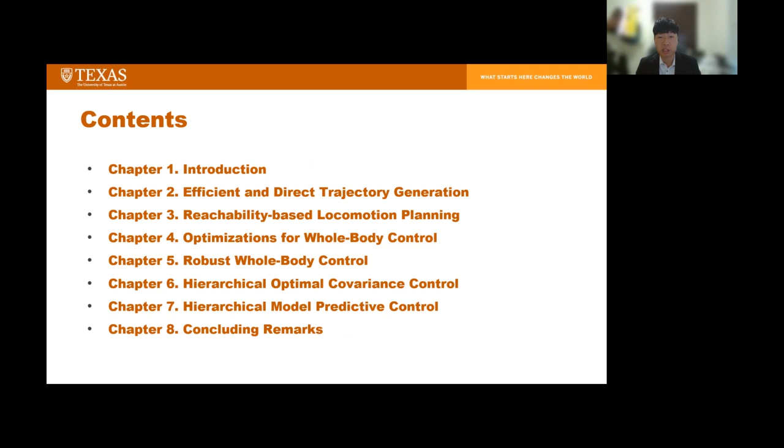The title is Whole Body Trajectory Generation and Control Strategy for Multi-Contact Robots. This presentation will cover these chapters in my thesis, but I will briefly introduce some parts due to time limitation. To begin, I'll share some background and motivation of my studies.

First, I'd like to introduce many robots I have experienced. In our lab, many robots have been developed and used, for example Mercury, Draco 2, Scorpio, Dreamer, and Valkyrie. I believe these robots have distinguishable features.

First, they generate human-like motion, such as dynamic locomotion and dexterous manipulation. Sometimes the robot produces legged manipulation like a human with multi-contact. Secondly, we aim to put these robots in unstructured environments, such as real human life, because these robots give us really good productivity while doing assigned missions in that environment.

Of course, the behavior should be optimal, in my opinion. Third, we should consider physical interaction, such as ground reaction force or unknown disturbances. Lastly, human-centered robots are usually operated with human-robot teaming, so they require safety-warranted behavior.

Oops. Oh, sorry, something wrong here.

Trajectory generation and path planning have been broadly investigated in the robotics community. To make continuous and smooth trajectories, we use many interpolation methods such as cubic spline and B-spline. Also, we've used RRT and PRM techniques, which are basically sampling-based techniques.

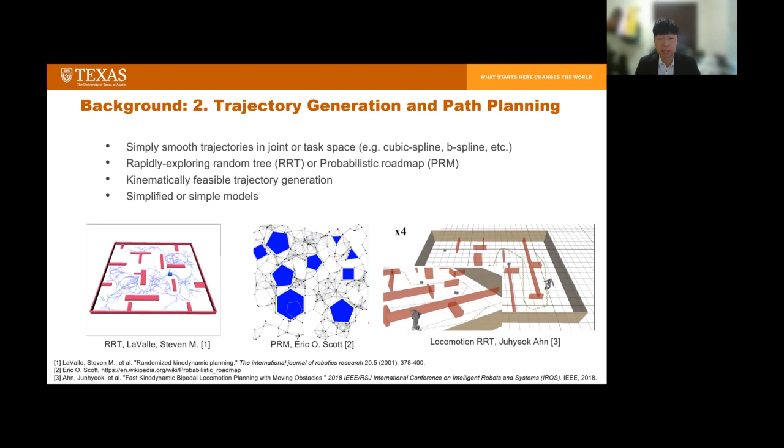In fact, contact is the main reason trajectory generation problems become more difficult. Many complex robots like legged robots, manipulators, and humanoid robots involve multiple contacts and frequently change the contact sequence. Also, the contact-related constraints are typically mixed state-input nonlinear constraints.

So we solve large-scale nonlinear optimal control problems to generate trajectories using optimal control techniques. According to recent publications, many research groups are utilizing nonlinear programming, mixed integer programming, and differential dynamic programming. As you know, it takes a tremendous amount of time to solve large-scale nonlinear optimal control problems, especially for a humanoid robot.

To speed up computation time, we use many approximations and simplification methods. Also, we can use simplified models such as centroidal dynamics or linear inverted pendulum model to reduce the dimension of our system. However, the solution to this problem may not fulfill the full body constraints, such as joint position, velocity, and torque constraints. Therefore, it is really important to solve the original nonlinear optimal control problem in a computationally efficient way.

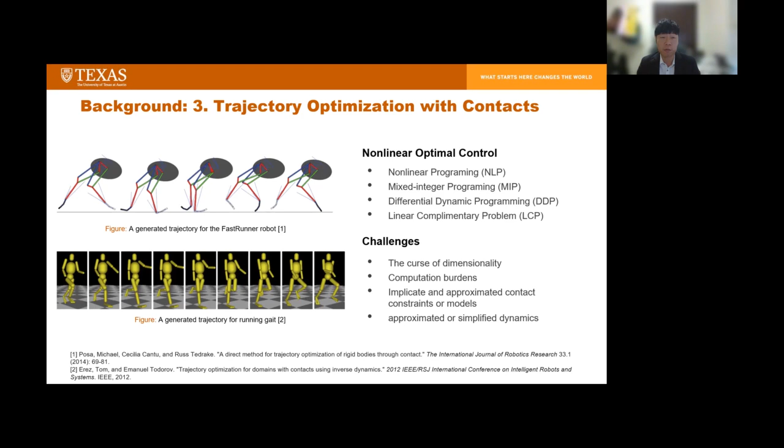Let's move to whole body control. Whole body control aims to define a small set of low-dimensional and straightforward rules, such as equilibrium and self-collision avoidance. Whole body control methods warrant the exact execution of one or multiple tasks. In most cases, the multiple tasks have a hierarchy in terms of their importance. Also, whole body control will exploit the full capacity of the entire body in compliant multi-contact interaction with the environment.

You can see many full body humanoid robots in the world. Whole body control will cover a lot of topics to control these robots: whole body position force control, model-based dynamics control, centroidal momentum control, multi-contact force distribution, agile locomotion, and dexterous manipulation.

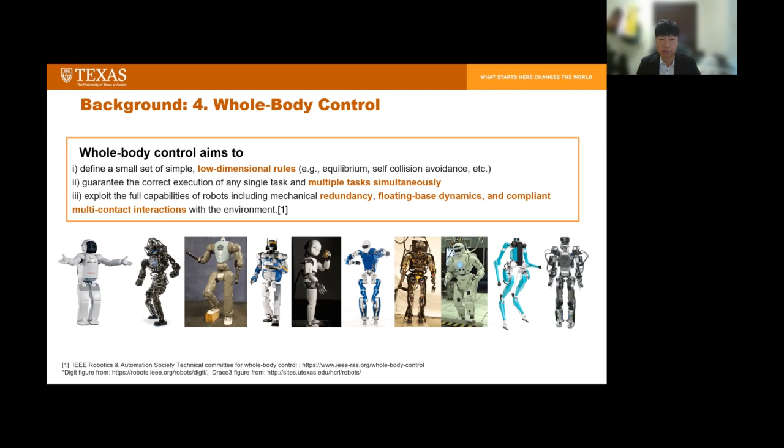Here is the motivation of my research. I'd like to introduce three main challenges for humanoid robot studies: trajectory generation, optimization, and tracking. My study aims to overcome these challenges to bring the humanoid robot into a human environment. We can think about what makes the problem more difficult: complex and nonlinear robotic systems, interaction with the environment or other agents, and multi-layered architecture.

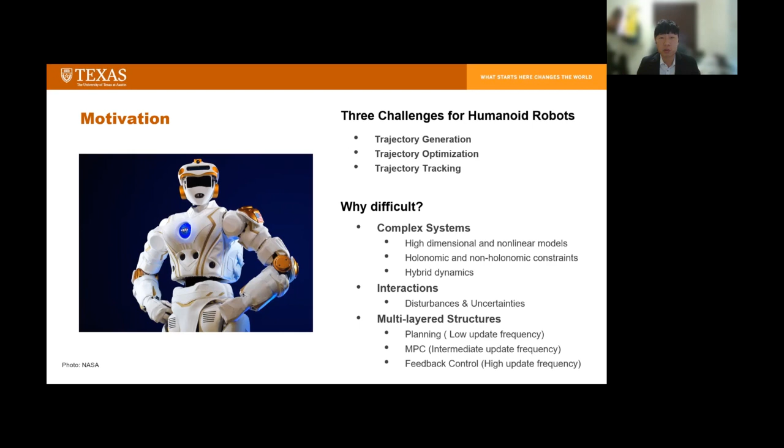Since both robot models and constraints are usually nonlinear, we have many difficulties generating trajectories with a reasonable time specification. Also, the computation time affects the multi-layered structure's stability. For this reason, I improved the performance of planning and control algorithms with reduced computation time. Robustness of the algorithm is also very critical for operating the robot while interacting with the environment, so we propose more robust whole body control approaches in terms of unknown perturbations and uncertainties.

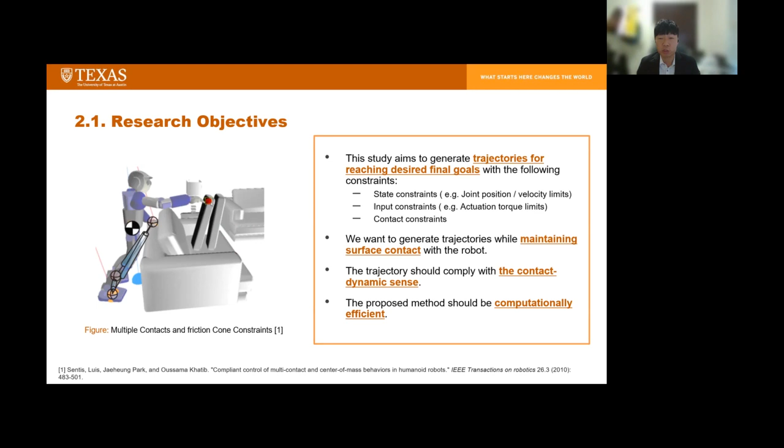I'm going to start by sharing my first study for efficient and direct trajectory generation of humanoid robots. This study aims to generate a trajectory to reach a final goal considering full body dynamics and complicated constraints. We consider state, input, and contact constraints, and joint position, velocity, torque constraints, which are very practical in real experiments. Also, we propose a very computationally efficient method without any simplification or reduced order model, like a linear inverted pendulum model.

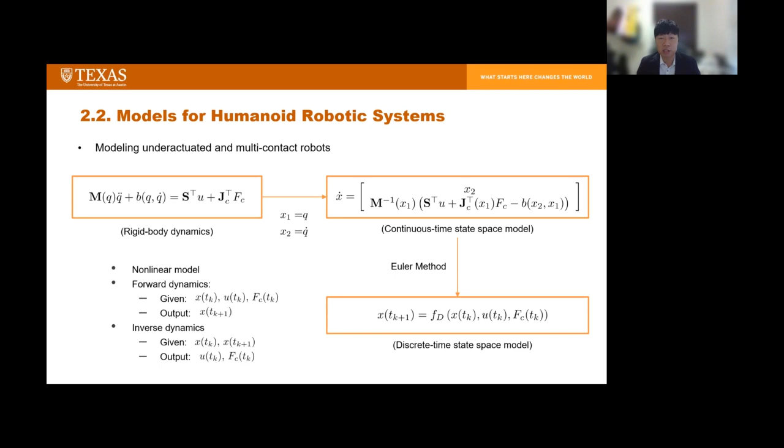Here I will briefly introduce the robot's full body dynamics and the state space model we used in this study. The rigid body dynamics of the underactuated robot is the first box of the equation. Floating-base robots, such as legged robots or humanoid robots, follow this underactuated robot dynamics. We can express the rigid body dynamic equation as a continuous time state space model, shown on the right side of the box. In turn, we can discretize the state space model as shown in the last equation. Unfortunately, the final model is still a nonlinear model.

As you know, joint position, velocity, and torque constraints are linear. The contact geometry and kinematic constraints are nonlinear state equality constraints. More specifically, the contact position should be constant, and both contact velocity and acceleration must be zero. We consider contact wrench constraints to prevent any slip and flipping motion of the contact body. This constraint is a mixed state-input constraint and even nonlinear, because matrix W is a function of Q configuration. As you can see, we need to consider very complicated constraints to warranty the feasible behavior of the humanoid robot.

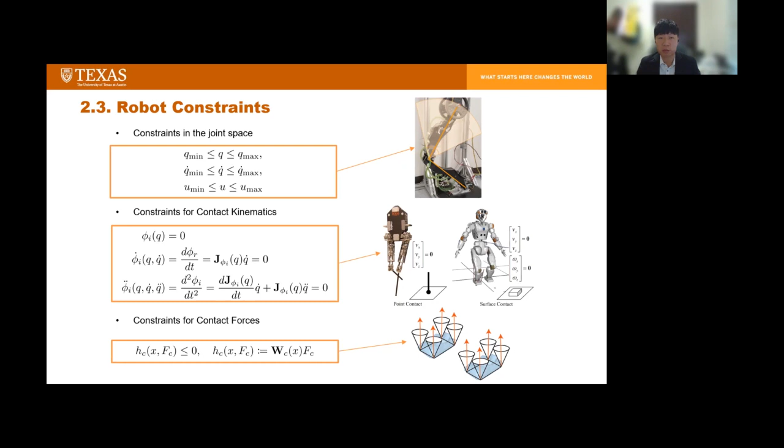Now we formulate an end-to-end trajectory generation problem for the humanoid robot. More specifically, the problem is to find a feasible state and input trajectory to reach a final goal when only the initial state and desired goal output are given. Of course, complex constraints should be satisfied while generating the motions. This is really a large-scale nonlinear optimal control problem, and it is very challenging to solve for a robot with multiple contacts. So we propose a novel method to solve this end-to-end trajectory generation problem very efficiently.

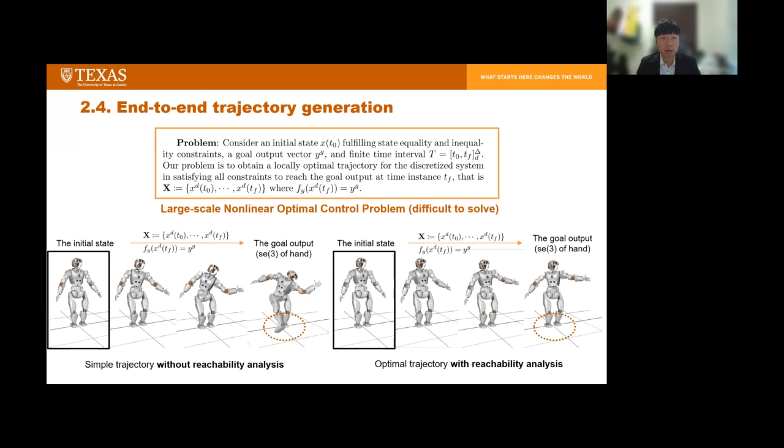First, we obtain the sample-wise state reachable set using a sampling-based technique. Then we formulate a POMDP problem to obtain an optimal sequence of output sub-regions. We check whether it is possible to move from the current output sub-region to the next one using our reachability tool. After confirming it is reachable, we sequentially solve the standard optimal control problems to reach the final goal. Let's move on to the details.

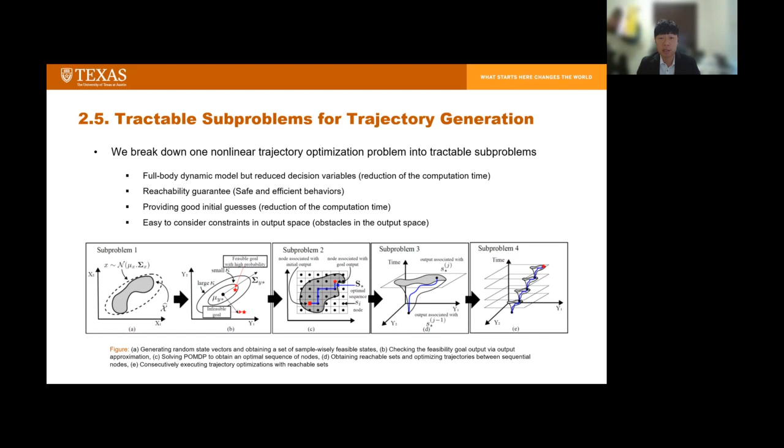First, we define the state sample-wise reachable set as a collection of states satisfying all constraints we have. This set is utilized to formulate the next POMDP problem.

I briefly explain how to obtain the set. We draw a random state sample from a Gaussian distribution and update it to satisfy the state constraint using the gradient descent method and QP.

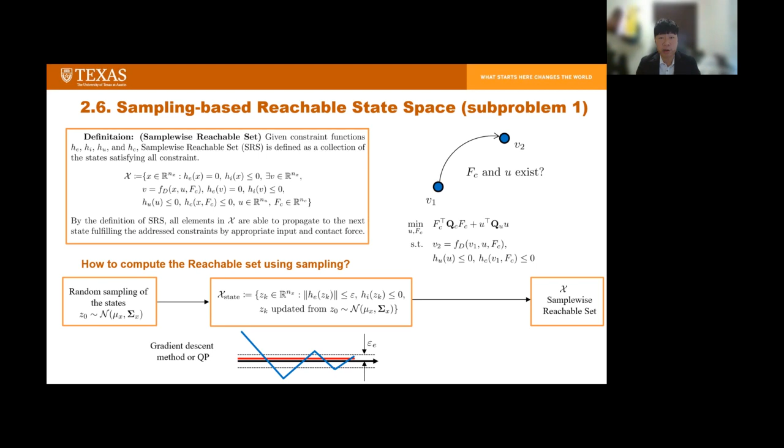In turn, we formulate the optimization to check there is at least one pair of control input and contact force satisfying our dynamics, input, and contact wrench cone constraint. If there exists at least one pair, we can collect the sample in our reachable set.

Based on the reachable set, we formulate a POMDP problem here. The main objective of this POMDP problem is to obtain a sequence of output sub-regions to maximize the reachable samples with conditional probability.

Secondly, we formulate a belief MDP problem using the previously obtained output samples and conditional probability. The reward function is formulated using the ratio of the cardinality of each subset. The key is how to formulate the belief transition function here.

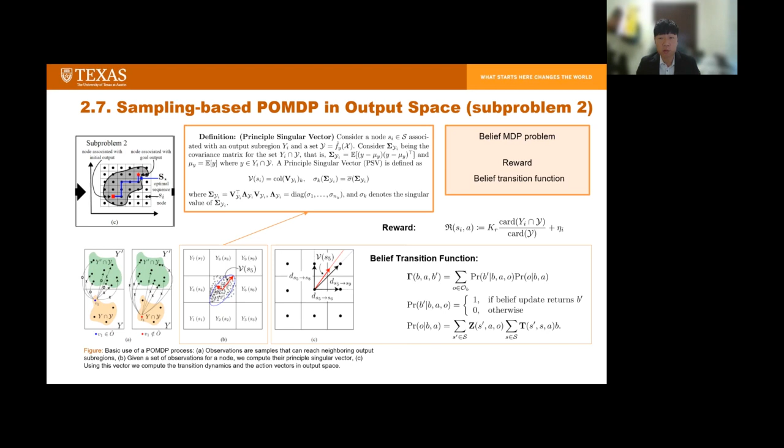The belief transition function can be formulated using the transition function and conditional probability Z. By solving this belief MDP problem, we can get the optimal sequence of output subregions toward the final goal.

To check whether the transition between the output subregions is feasible or not, we propagate our state using the formulated QP. There exist two propagation methods here: full state propagation and boundary state propagation methods.

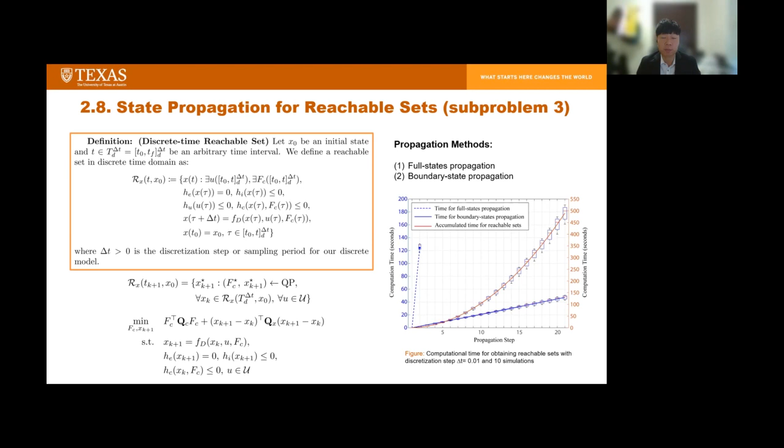After that, we sequentially solve the optimal control problems. We formulate the standard optimal control problem to obtain feasible state input trajectories here.

We define the performance index using output error and state error and some contact force term. We minimize this performance index subject to discrete time state space model, state inequality equality constraint, input constraint, and contact wrench cone constraint. The desired output will be the final goal if the next subregion is the last one.

Also, if the current subregion is the first one, then we use the given initial configuration as the initial state of this optimal control problem.

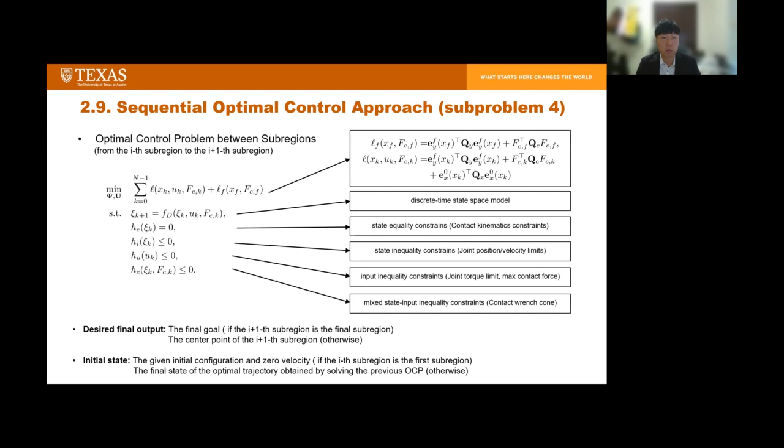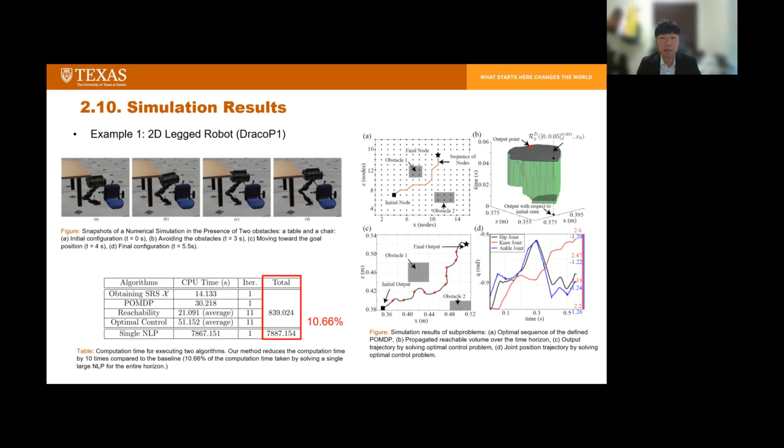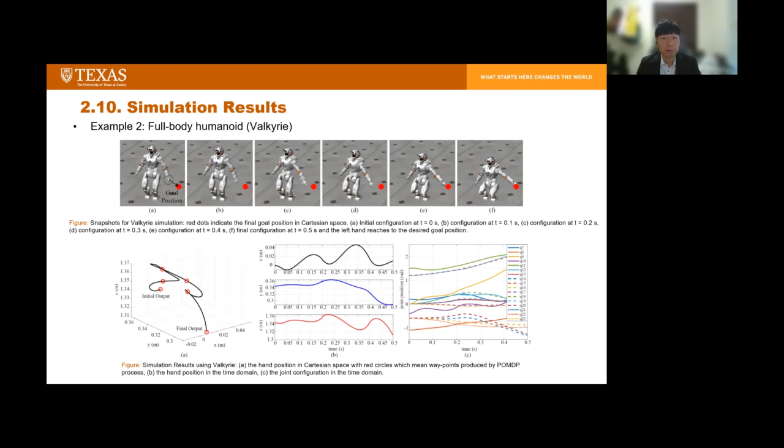So far, I presented the first part of my studies, and the second study is reachability-based locomotion planning.

We frequently use different models in the layered structure of whole-body control. For example, we employed a reduced order model at the planning level, but the feedback controller is based on full body dynamics. We are interested in the discrepancy between planning and control models.

In this study, we used the time to velocity reversal planner in the planning step. However, our whole body controller is a full state feedback controller. This means we don't know if the planned result can be reproduced by a full body robot. Sometimes the planned position cannot be reached due to the full body constraint.

We propose a method to check if the planned location is reachable, and in turn, optimize the trajectory for the next whole body controllers.

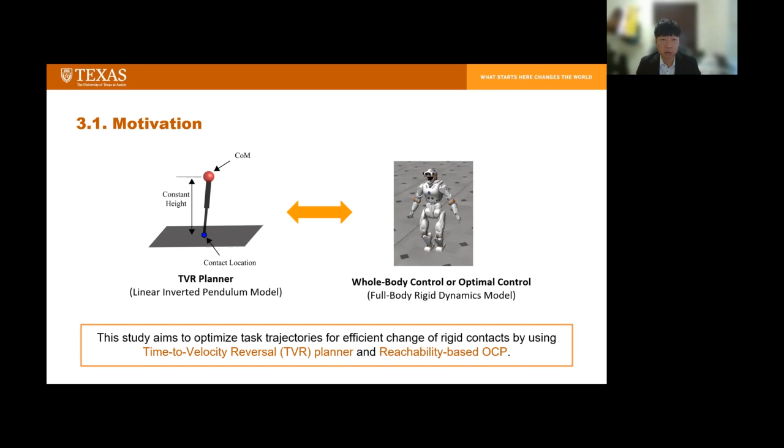However, we propose an additional part of kinematic feasibility test, reachability analysis, and optimal control for better locomotion. By using the proposed trajectory generation process, we want to make sure of safe and stable locomotion.

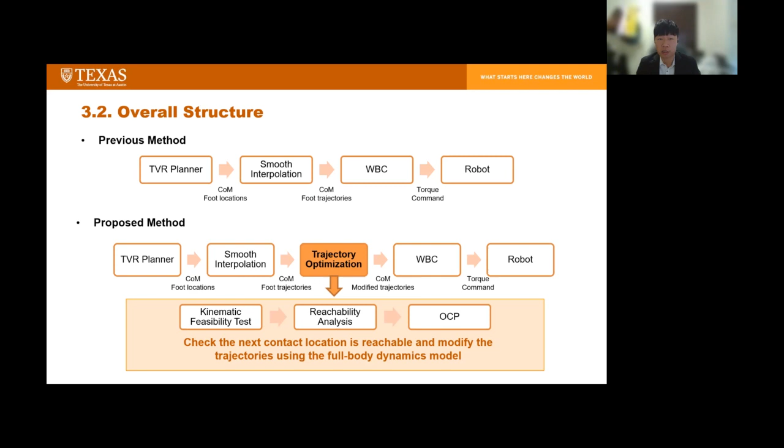Our TVR planner attempts to stabilize the robot by making its center of mass reverse direction every step. In its simplified model, the feet instantaneously change between swing and support mode, and the center of mass reverses its velocity at time t prime after the previous contact switch. The planner finds and returns the footstep location that causes the center of mass velocity to reach 0 at t prime time after the foot switches.

This planning method is very intuitive and easy to implement, also very fast and reactive, but full body constraints are ignored at the planning level.

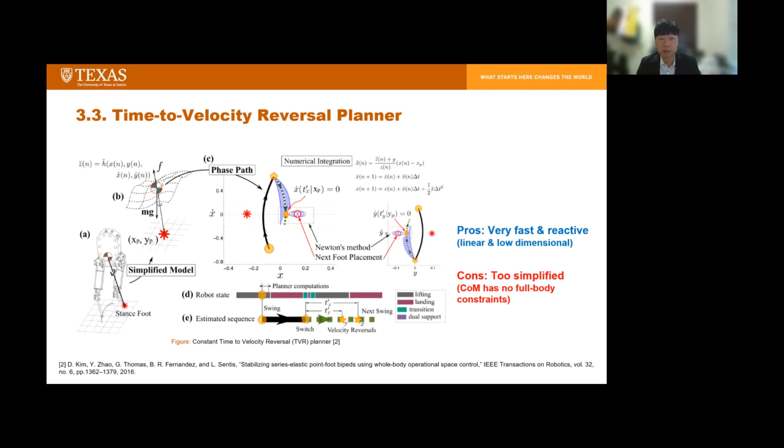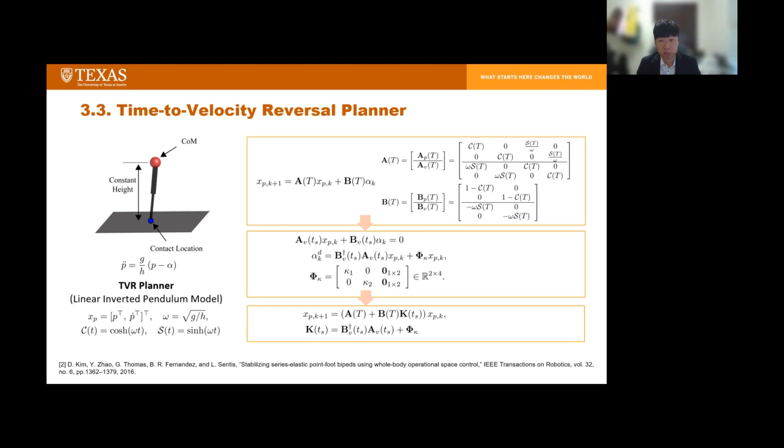Based on that linear system, we can determine the next foot location easily, of course satisfying that the apex velocity is 0. But we still have many hand-tuned parameters based on our experiences, such as kappa in the second box, and the apex time ts.

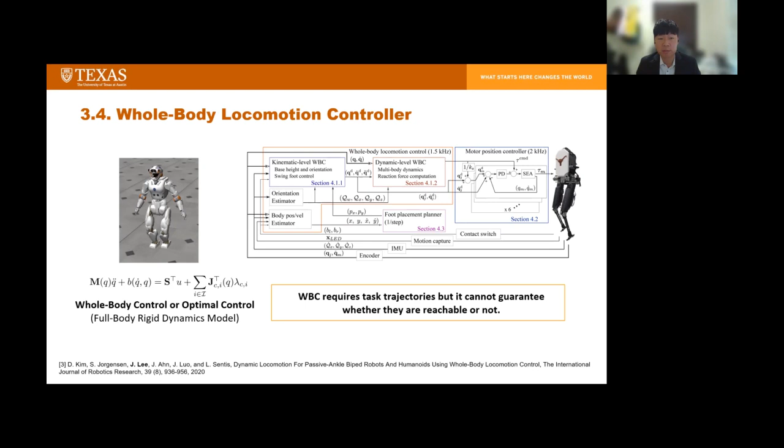What I want to say here is that this whole body controller cannot warranty whether the previous trajectories are feasible or not. So we propose a method for obtaining forward and backward reachable sets.

In terms of a given contact mode, these methods are based on sample-wise optimization and propagation. For computing the forward reachable set, we draw random control input samples, of course satisfying the input constraint, and solve the QP to obtain the joint acceleration satisfying all constraints. The initial state can be propagated forward in this way over some time horizon.

Also, we can obtain the backward reachable set by drawing joint velocity samples. We project the joint velocity sample onto the null space of contact space to prevent any violation of contact kinematics constraints. Then we check if there is at least a pair of input and contact force in the formulated optimization problem. If yes, we can propagate the states backward, otherwise we discard the samples.

By combining the previous forward reachable set and this backward reachable set, we can efficiently check whether the next contact location is feasible or not.

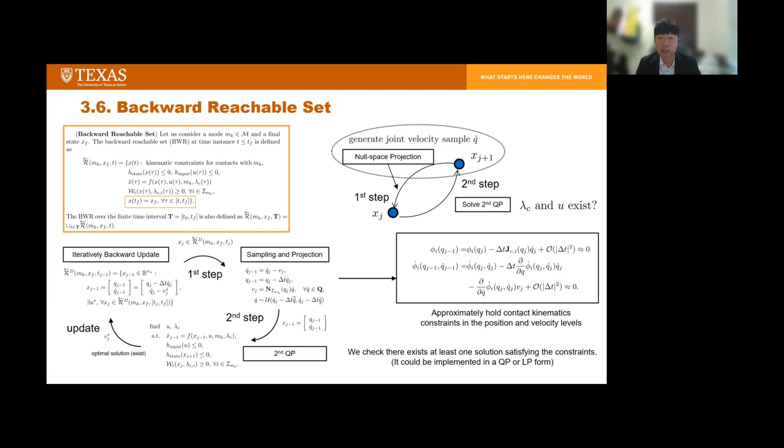Based on the previously computed reachable set, we can simply test whether our states are reachable or not over the contact switching time horizon. Then we solve the formulated optimal control problem to generate a trajectory to change the contact mode efficiently, of course satisfying all the constraints.

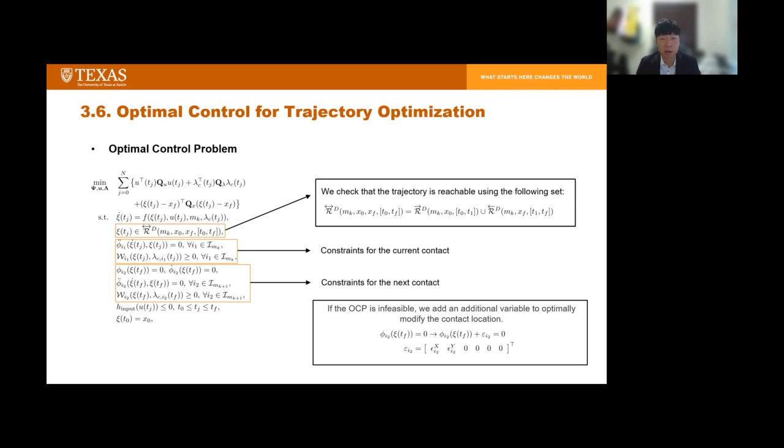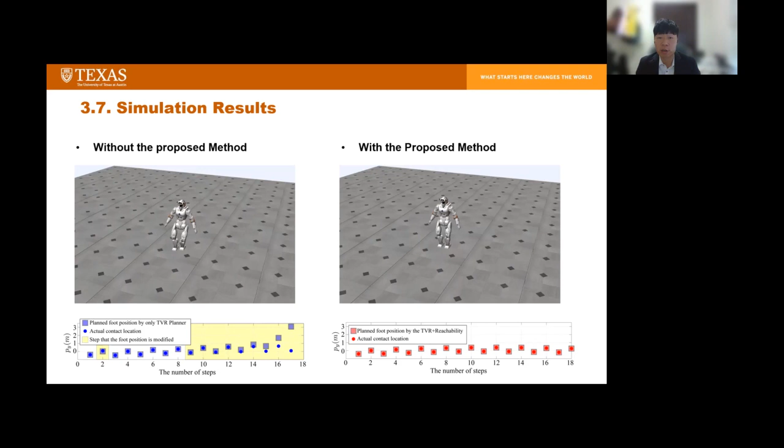The third study is about various whole body control approaches. Due to some time limitation, I will briefly introduce this section.

We have tried to improve the performance of whole body control methods. I have collaborated with our alumnus Donghyun to propose new whole body controllers. The first one is the whole body dynamic controller. We combine a QP for computing contact reaction force with a projection-based method.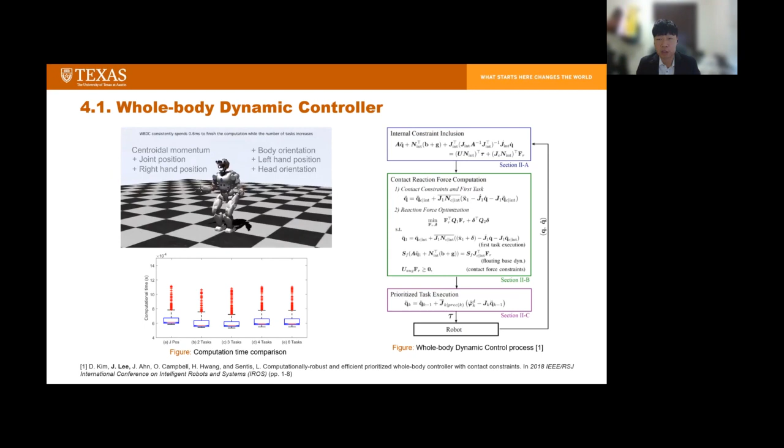I implemented some simulation work and analyzed the computation time in terms of the number of tasks. The computation time is between 0.5 millisecond and 1 millisecond, which is fast enough for real-time implementation.

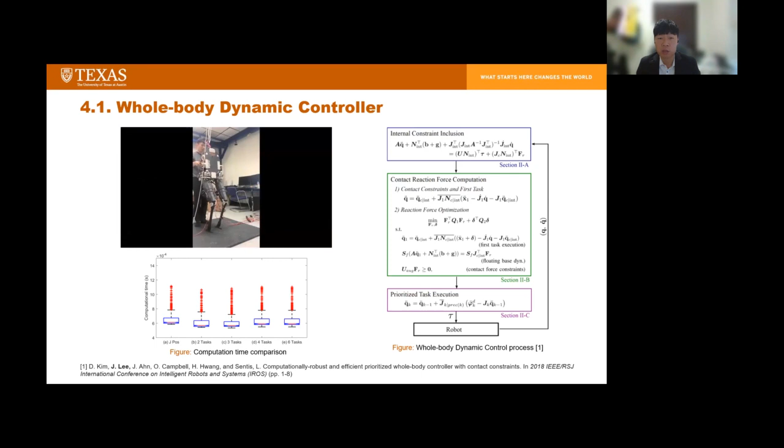The second whole body control approach is called the whole body locomotion controller. It is updated at 1.5 kilohertz, which is also very fast. We combine both kinematic level and dynamic level control.

Using kinematic whole body control, we compute the desired joint position, velocity, and acceleration given the desired trajectories. In turn, we consider robot dynamics and contact force constraints in the dynamic whole body control architecture. Based on the solution to this optimization problem, we obtain the torque command with the desired joint references.

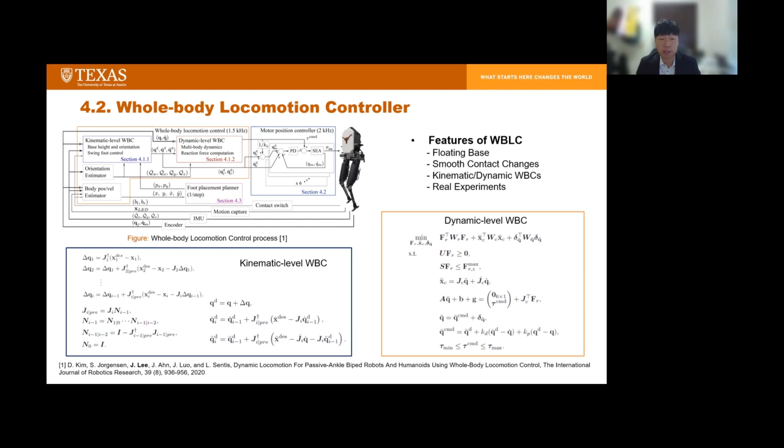This video is a real experiment by Donghyun and I. Mercury walks stably, even though we throw the ball and push the torso.

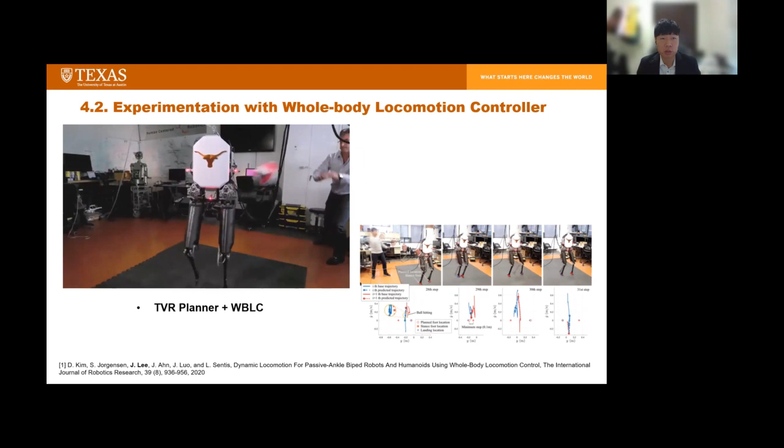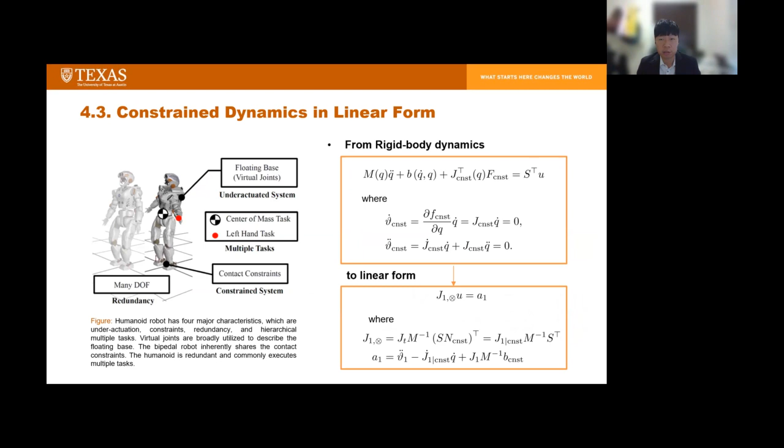Next, I formulated the whole body control problems in many optimization forms and compared the solutions to each other. Given the current position, velocity, and desired acceleration, we can express the constrained rigid body dynamics as a linear system. Humanoid robots are usually redundant systems, so the solution to whole body control problems generates different whole body behaviors in terms of their cost functions.

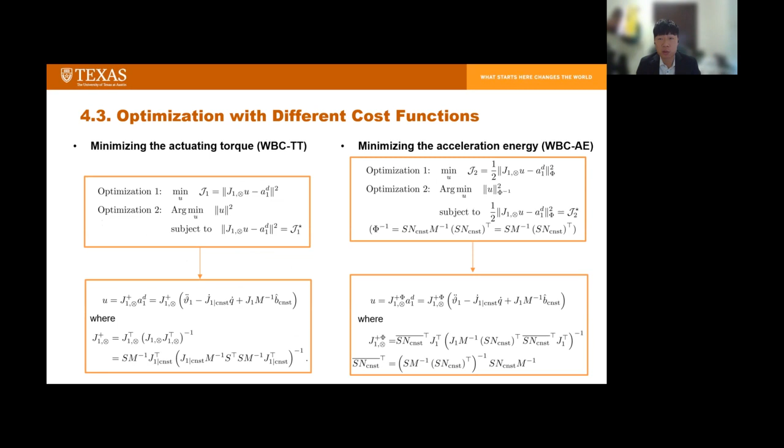Here, we formulate two optimization problems with different cost functions. The first formulation is to minimize the actuating torque, and the second is to minimize the acceleration energy. We can simply derive an analytic solution to each optimization problem, as shown in the boxes below.

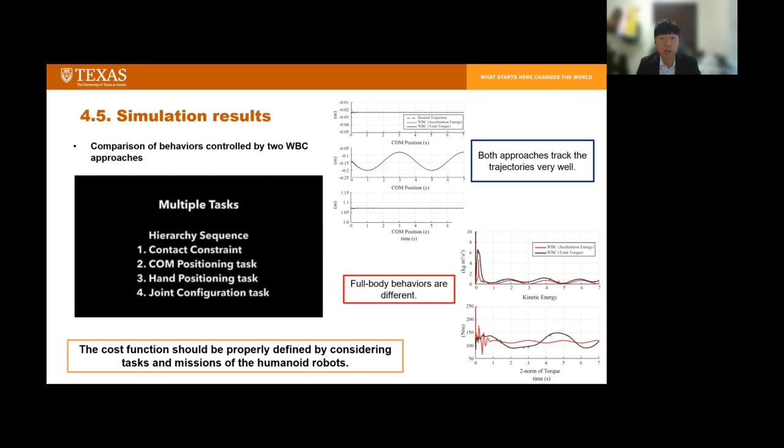There are some simulation results of the previous two whole body control problems. We employ these controllers to track the center of mass trajectory, and both control approaches follow the center of mass trajectory very well. As shown in the right side figure, the error is almost zero. However, they produce different whole body behaviors.

This study gives us a lesson that we should properly find the cost function by considering motion primitives and mission features of the robot.

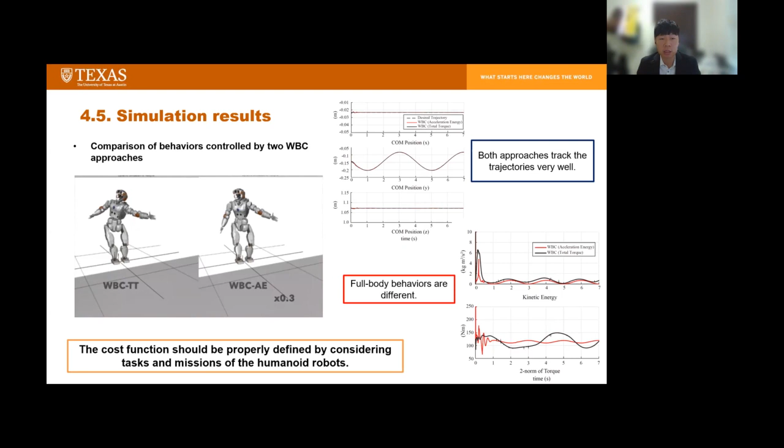The next topic is robust whole body control for bipedal robots under unknown disturbances. Draco 2 has very small feet and not very strong ankle actuation, so it is hard to keep balance with a double foot stance under unknown disturbances.

I have experienced that the ankle joint sometimes generates oscillatory behavior and easily falls down when I push the torso of the robot. Therefore, we create a more robust whole body control approach against this kind of external perturbation, as an extension of our previous control studies.

Without properly accounting for external forces, we found the robot may become unstable, so the desired task may not be achievable. In addition, the stability of joint error dynamics has not been discussed yet when external disturbances are applied to the robot.

Instead, most papers analyze the stability of the task error dynamics. However, the stability verification based on task error dynamics cannot guarantee the full body stability of the robot.

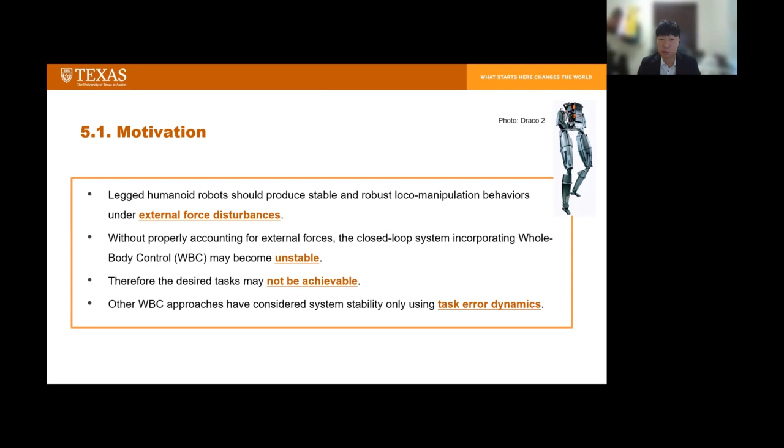This is the detailed whole body locomotion controller when applying unknown external forces. We are using joint space impedance control with a feed-forward torque command, which can be calculated by the optimization problem.

By solving the optimization problem, we can decouple the closed loop joint space dynamics and make each joint space dynamics a critically damped system using very classical PD control.

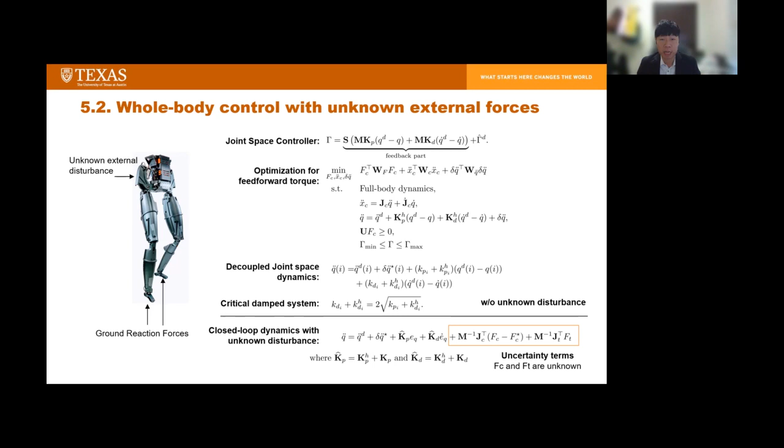Let's think about the case where there is some unknown external disturbance with contact force. Then we cannot decouple the joint space dynamics due to the force related to the unknown part in the last equation. This means the closed loop joint space dynamics can become unstable due to the external force. So we need to adapt our feedback gain to keep our robot stable.

The upper figure shows the block diagram of our robust whole body control architecture.

We utilize the whole body locomotion controller and predefined task specification without further modification. What we need to do is just adapt our feedback gain in the whole body control architecture in real time. The lower figures show how to adapt the feedback gain of our whole body controller.

First, we compute the ground reaction force using the whole body controller. Second, the linear and angular momentums are computed by the centroidal dynamics. Using the centroidal momentum and ground reaction force, we can estimate the unknown external force with respect to a body frame defined a priori. Using the ground reaction force and estimated disturbances, we analyze the full body stability and adapt the gain to ensure stability.

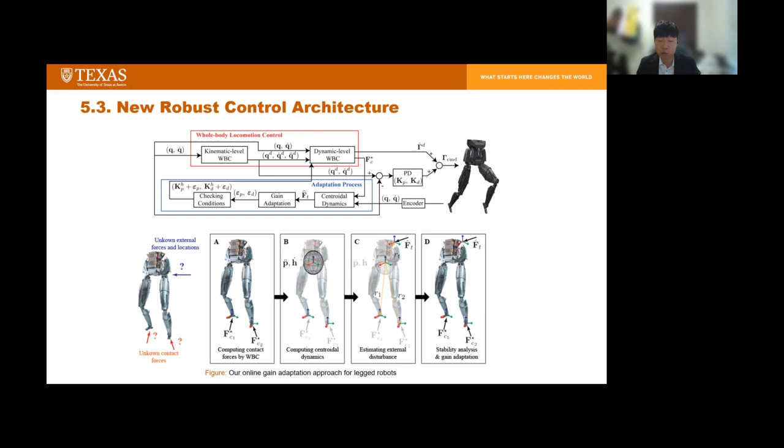The key feature is to employ both full body dynamics and centroidal dynamics. Because centroidal dynamics does not involve our control input term, we can intuitively figure out the relationship between the ground reaction force and external disturbance without our controller.

This is the detailed process to obtain the adaptive variable for our feedback gain. Using the rigid body dynamics and our whole body control formulation, we can express the joint acceleration for the actuated joint part. Unfortunately, we cannot express the joint acceleration formula as a second order differential equation due to the Ft term in the purple circle on the right side.

So our idea is to replace Ft terms with respect to Q dot and some constant term. Centroidal dynamics enable us to approximate Ft without our torque command, as I mentioned. As a result of this approximation, we can express some terms, including Ft, in terms of Q dot and some constant term, as shown in the last equation of the right side box.

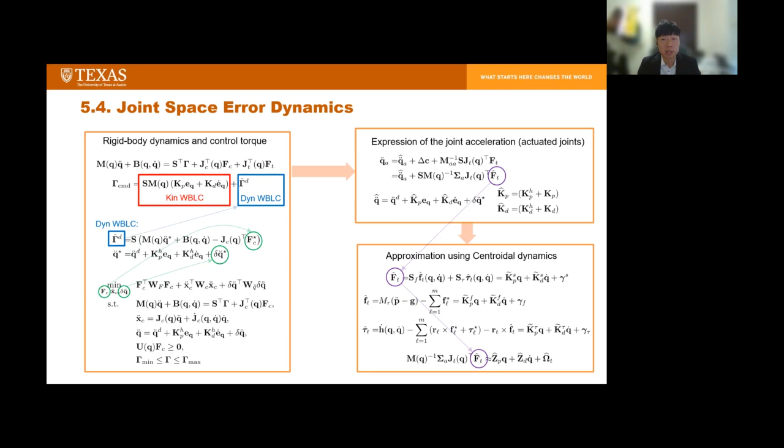Using the previous calculus and approximations, we obtain the joint space error dynamics and formulate its state space model with a state consisting of joint position and velocity errors. Now the state space model becomes linear. Furthermore, we can select some detailed variables to make omega hat negligible. Then it becomes very clear to show the stability of this system.

V should be Hurwitz. In the characteristic equation box, we obtain a second order equation with respect to eigenvalues. It means trace Kp minus Zp and trace Kd minus Zd should be positive when V is Hurwitz. From this condition, we can select proper adaptive variable epsilons, satisfying the condition given nominal natural frequency and damping ratio.

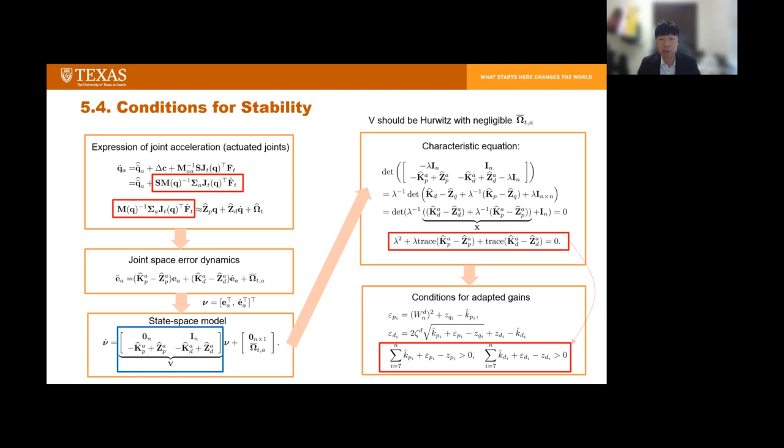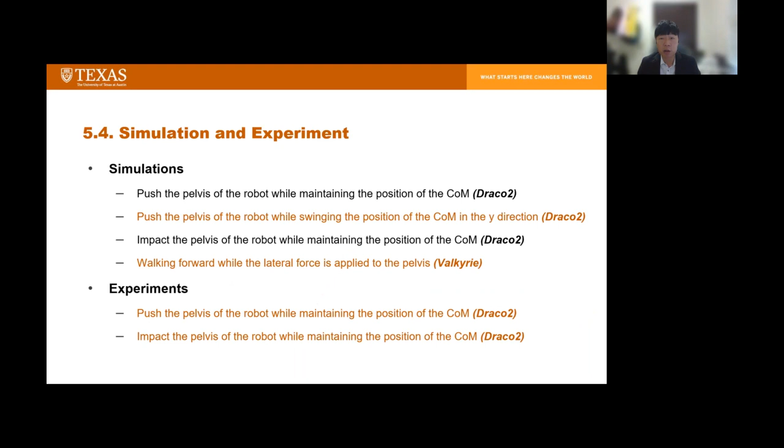We demonstrate a lot of simulations and experiments to validate our algorithm. Among these, I will show you 4 results as highlighted in orange color. We compare the result with and without our gain adaptation approach.

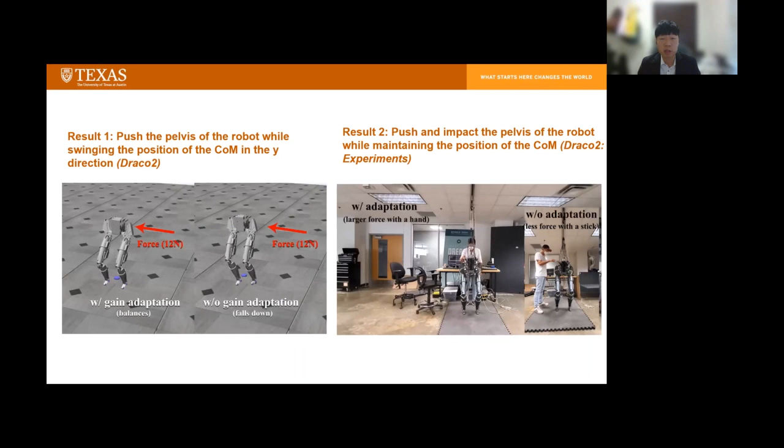First, we implement a behavior consisting of swinging in center of mass position with double support stage. We generate a sinusoidal reference for the center of mass, with 0.03 amplitude and 0.5 frequency. The controller with a fixed gain falls due to the effect of external force. On the other hand, the adaptive gains prevent the robot from losing balance.

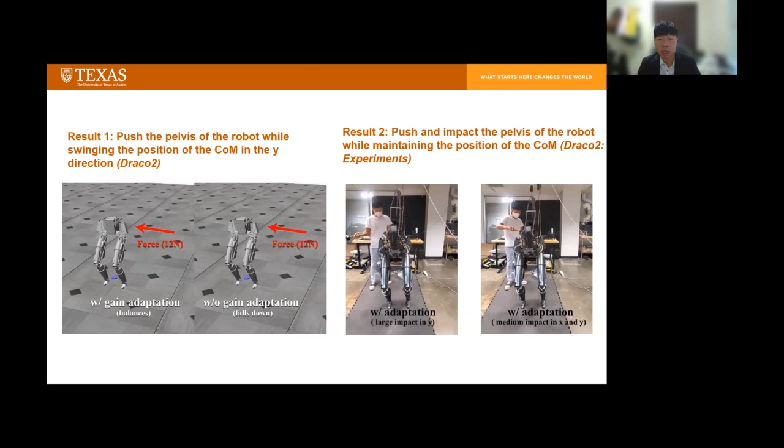Secondly, we demonstrated a real hardware experiment. Our robot Draco 2 is a line-feet robot, so it is very challenging to keep the balance in double support stage, while pushing on the torso. The scenarios are to keep the balance under pushing and impact force in double support stage. We verify that with our adaptive gains, the robot becomes more robust in the real experiment as well.

Lastly, I compared the result with and without the proposed method in locomotion. We generated a walking pattern using a DCM planner and made the robot walk forward. We applied a 100 Newton lateral force at the pelvis. The robot with a fixed gain falls due to the lateral force. In contrast, our gain adaptation method enables the robot to keep walking against the force. Without modification of the controller, we make the robot more robust and stable against external forces.

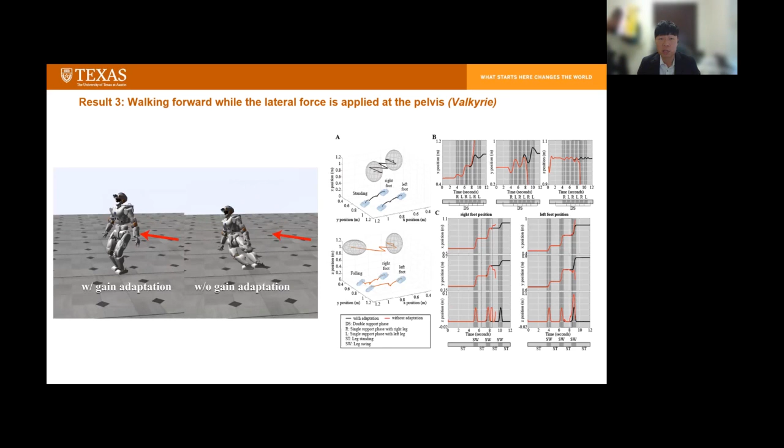This chapter is about hierarchical optimal covariance control.

As I mentioned, whole body control is really good, but it still has a lot of issues and limitations. First, whole body control relies on classical PD control, which is well known to not be good for noisy feedback control systems. Also, we cannot consider the state covariance constraint in whole body controllers. For this reason, the terminal state may be very far from the desired goal state.

So I employ optimal covariance control to solve this problem. The optimal covariance control problem is to steer the initial state, drawn from a Gaussian distribution, to a specific desired terminal Gaussian distribution, as shown in the right side figure. However, most recent covariance work focuses on a single stochastic system, not a hierarchical system. So I want to extend this optimal covariance control approach to hierarchical task space systems.

Let's compare the proposed hierarchical covariance control with hierarchical QP. Hierarchical QP solves only a single time step least square error minimization problem, with a deterministic model without any uncertainty. However, hierarchical covariance control considers a stochastic system with a multiple time horizon. Both approaches aim to control multiple hierarchical tasks. In this sense, I think hierarchical covariance control is one extension of our whole body control for stochastic systems.

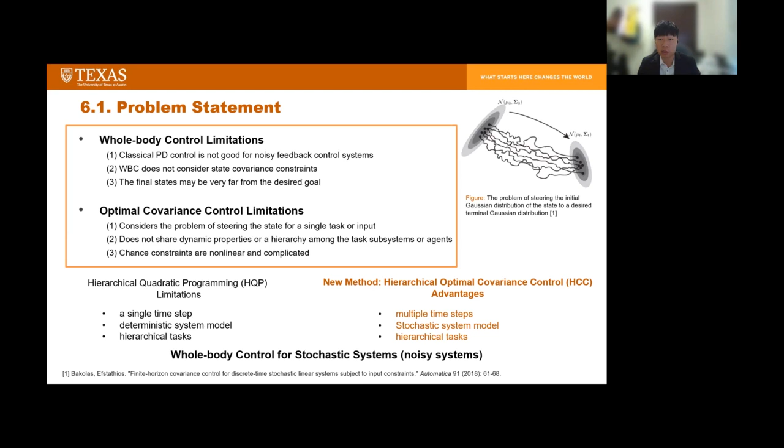The punchline of the proposed approach is quite simple. First, we transform the rigid body dynamics model into multiple stochastic systems considering noise process in the task space. In turn, we linearize and discretize the stochastic system. Then we solve a lexicographical optimization problem for all given tasks. We benchmark a hierarchical QP structure to control multiple hierarchical tasks of the robot in this way.

We define the task space covariance control problem in Problem 1. We assume we know the mean and covariance of the initial and final stage a priori. The performance index consists of the expectation of quadratic terms of state and input. And we consider 5 constraints: the state space model, terminal state mean constraint, terminal state covariance constraint, chance constraint using Euclidean distance, and constraint for task hierarchy. The last constraint can be replaced by the null space projected task space Jacobian and task space dynamics, meaning the B matrix in constraint 1A contains the null space projection matrix.

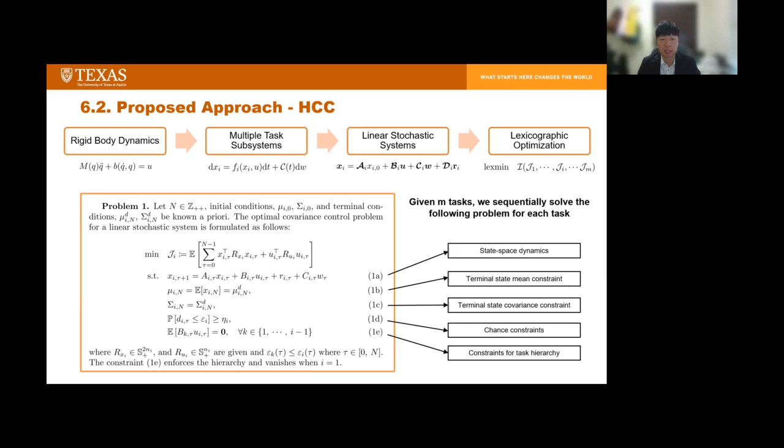Unfortunately, we need to employ NLP to directly solve the defined problem. However, we want to solve this problem using convex optimization because convex optimization is much faster than NLP. To do that, we define a new decision variable to formulate our problem as a convex optimization problem.

We consider the state space model concatenated for all time horizon and control input U. In this case, mathcal K is the original decision variable. The closed loop system can be expressed in the second box with a decision variable K. However, we don't want to consider the inverse of our decision variable K. So we represent the state of the closed loop system with a well-defined decision variable psi.

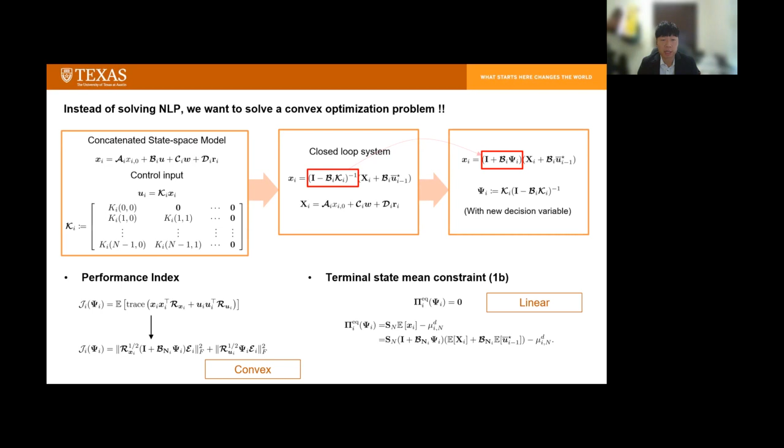Using this new decision variable psi, we can rearrange the performance index and all constraints to be convex. First, the performance index consists of two Frobenius norms, which is convex. Then the terminal state mean constraint 1b becomes linear in terms of our decision variable psi. The terminal state covariance constraint 1c and the chance constraint 1d are formulated as positive semi-definite matrix constraints.

I will skip the detailed derivation of this due to time limitations. Please see the detailed derivation in my thesis. Now we formulate our problem 1 as a convex optimization problem, which can be solved using semi-definite programming. The good news is SDP is much faster than NLP, and we can obtain the final control input by sequentially solving the formulated covariance control problem for all tasks from the first one to the last one.

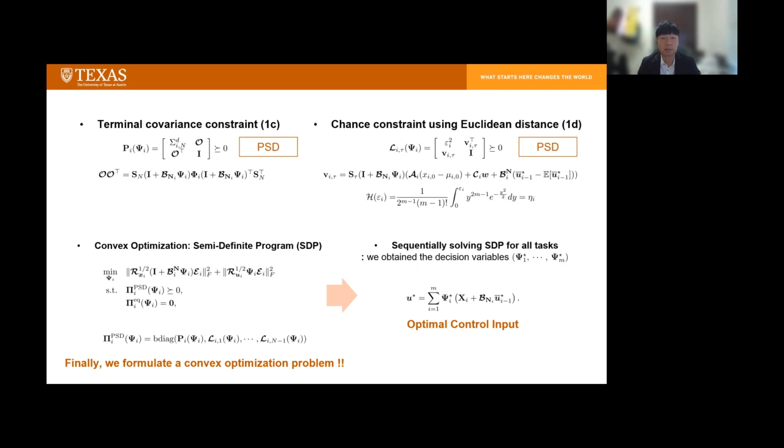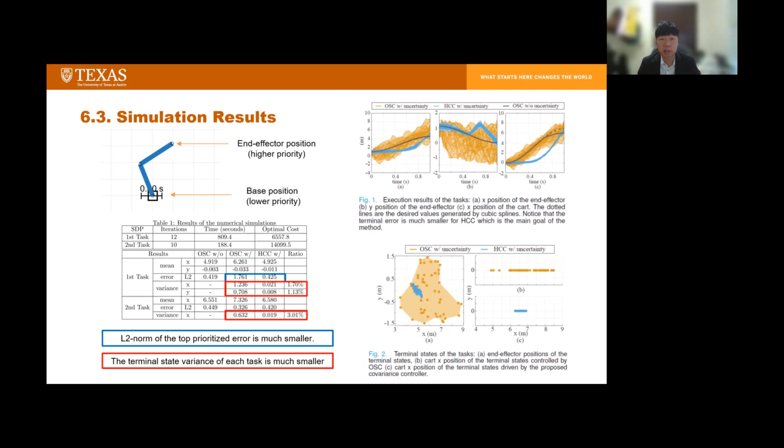The last study is hierarchical model predictive control. The current whole body control method has many strong points. The existing methods are very intuitive and employ full body dynamics and constraints. We can compute the whole body control approach very fast, and we can use them for real-time application.

However, they still have shortcomings, as I mentioned. The method considers a single time step optimization problem, so it may generate very myopic behavior and depends on a predefined hand-tuned trajectory. Also, we cannot guarantee optimality over the entire time horizon.

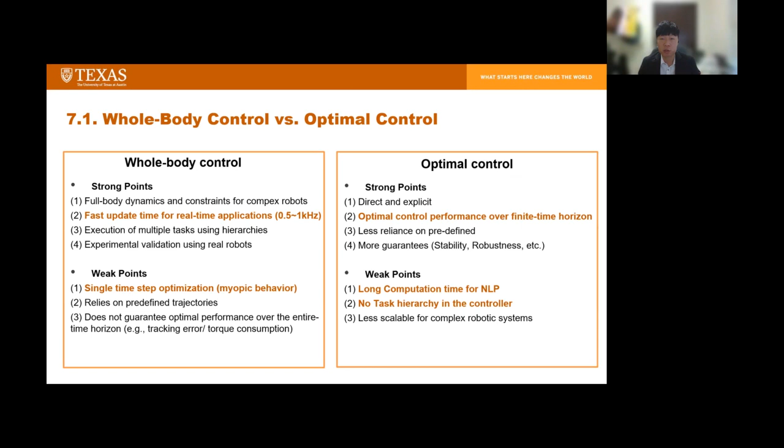On the other hand, optimal control and MPC can consider multiple time horizons to guarantee more global optimality. In addition, we don't need reference trajectories in many cases. We can solve the optimal control problem without nominal trajectories. However, it takes a very long time to solve, especially for larger scale systems like a humanoid robot or constrained manipulators.

Let's take a look at the proposed approach using MPC. We express the state space model of the underactuated robot, and the state space model is nonlinear, unfortunately. We can formulate a standard optimal control problem. One special part of this optimal control problem is that we borrow some physical intuition from whole body controllers. We will minimize the performance index subject to the state space model, inequality constraint, and equality constraint.

Unfortunately, this is a nonlinear optimal control problem. Almost every part of this problem is nonlinear and non-convex. In addition, another challenge is to formulate the constraint for task hierarchy over multiple time steps. The main idea is to formulate the constraint for task hierarchy using the tracking error of each task. Also, we will convert this nonlinear optimal control problem to a quadratically constrained quadratic program, called QCQP.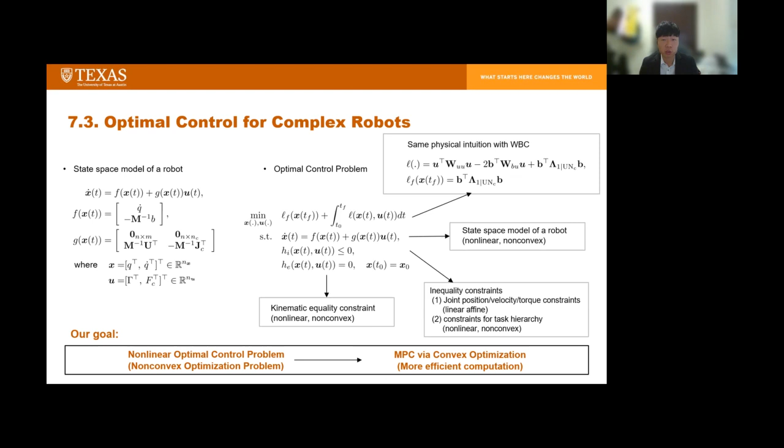First, we linearize the state space model. There are a lot of linearization techniques. Among them, we select a simple way to linearize the system along nominal trajectories. Given nominal trajectories of the state and input, we linearize the state space model. In turn, we discretize it with discrete time interval delta tau. Then we define two decision variables, which are vertically concatenated states and input variables over the time horizon. We can obtain a linear equality constraint with our new decision variables mathcal X and mathcal U.

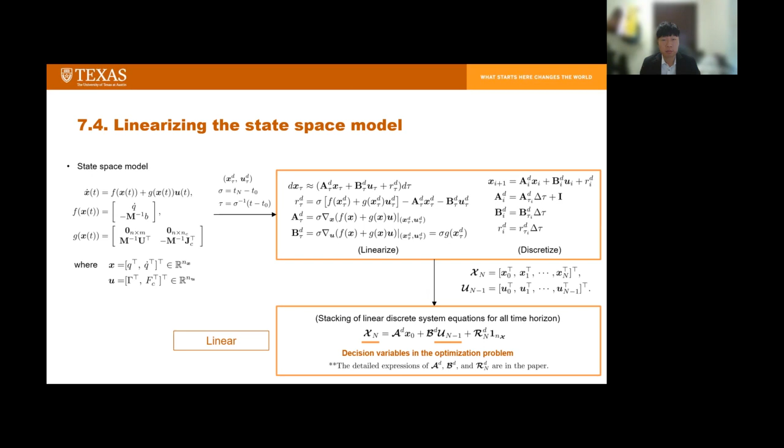Secondly, we define the constraint of task hierarchy. Given n tasks, the tracking error of higher prioritized tasks should be less than those of lower prioritized tasks. We define this constraint using the square of two norms of the task tracking errors.

These inequality constraints are nonlinear because the task function is usually nonlinear. Thus, we convexify this inequality constraint using nominal trajectory as the left side inequality constraint. We properly stack the Jacobian and coefficient vectors for all time steps. Then the inequality constraint can be expressed as a quadratic inequality constraint in terms of our decision variable X.

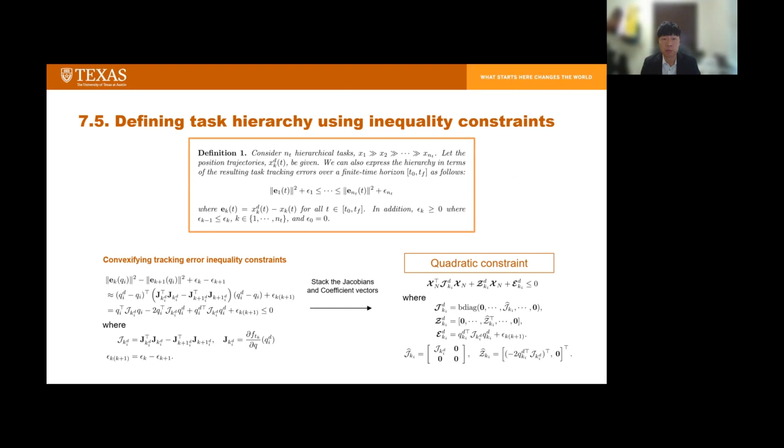The third part is to convexify the performance index. We want to express the performance index using the quadratic and linear terms of the decision variables.

Before convexifying the performance index, we extend the expression of running and terminal cost functions. We replace the Jacobian J and vector B with the stack of Jacobian, gain, and desired task velocity vectors for all multiple tasks. Then the lambda matrix and B vector can be recalculated using the stacked matrix and vectors. Then running cost and terminal cost are expressed using quadratic and linear terms of the state and input variables, as shown in the upper body.

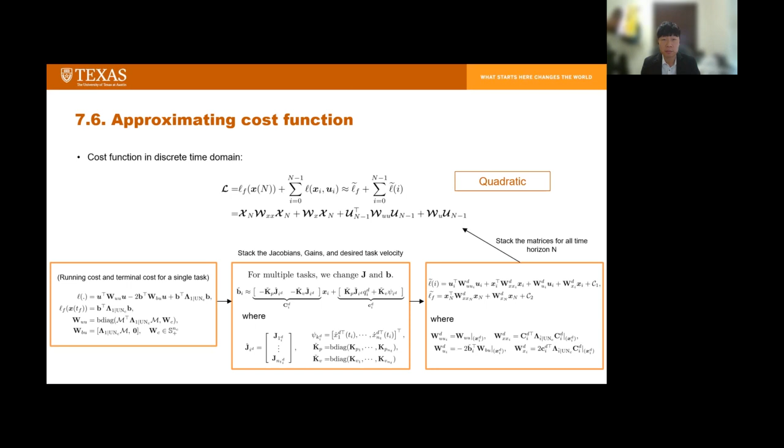In the previous slide, we linearized and convexified the nonlinear terms to formulate our problem as a convex optimization problem. Now the optimal control problem becomes a QCQP. We can solve this problem using convex optimization tools much faster than NLP. With proper prediction and execution time horizon, we iteratively solve this QCQP and update the dynamics of the robot, as described in algorithm 1.

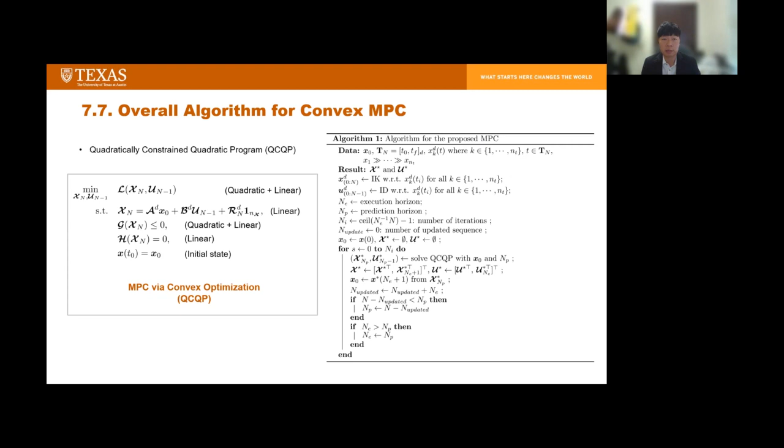We verify the proposed approach using numerical simulations using a manipulator, Scorpio. In this simulation, we define two hierarchical tasks. The higher prioritized task is to control X, Y wrist position, and the other task is to control X and Z elbow position. The existing whole body control approach minimizes the higher prioritized task first and handles the lower prioritized task, as shown in figures in the first row.

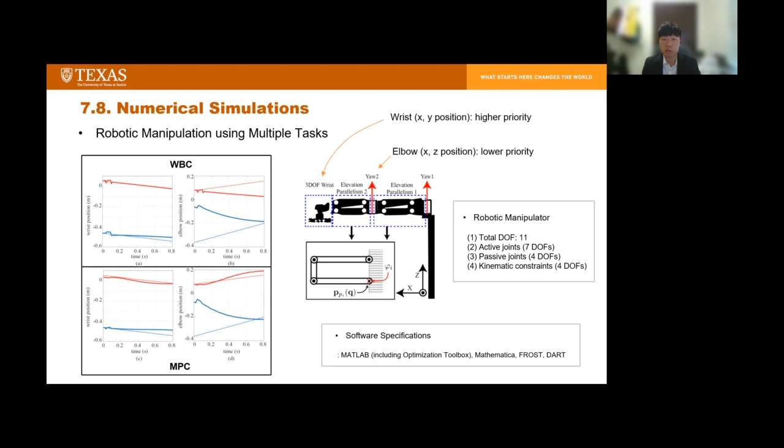Compared with whole body control, the proposed MPC method slightly increases the tracking error of the wrist positioning task, but the secondary task error is significantly reduced, as shown in the red lines of the second column figures.

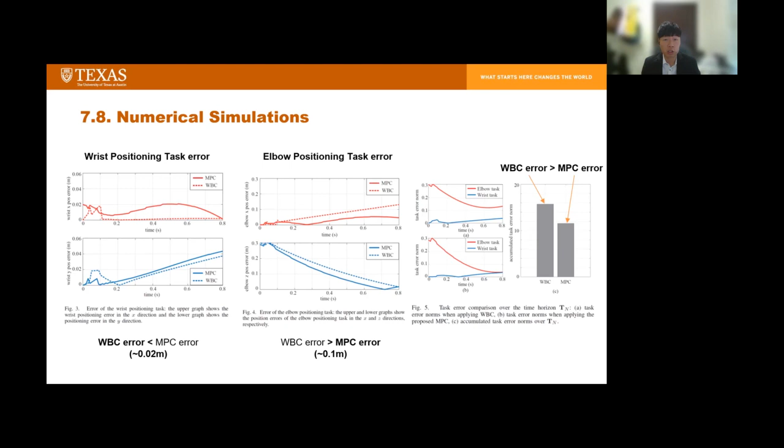In detail, we can compare the tracking errors here. Compared with whole body control, the proposed MPC approach increased about 0.02 meter error of the wrist positioning task, as shown in the first figure. On the other hand, we significantly reduce the tracking error of the elbow positioning task, approximately 0.1 meter, as shown in the second figure. Our last figure shows that the wrist position tracking error is always smaller than that of the elbow positioning. Also, the proposed approach results in smaller accumulated task tracking error than the whole body controller.

The proposed MPC method reduces the sum of tracking errors, while warranting that the wrist positioning task error is always less than the elbow positioning task error. In addition, we formulate this optimal control problem as a convex optimization. For sure, this convex optimization is much faster than nonlinear programming.

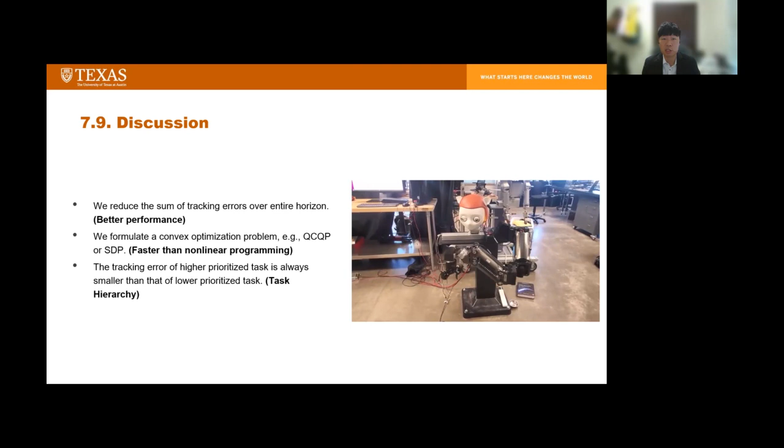This is the conclusion. I have 5 journal papers and another 5 conference papers. In addition, I collaborated with our lab mates to produce 3 papers, and I will have 2 more papers in the near future. I will briefly summarize the contributions here, really briefly.

In chapter 2 and 3, we propose a new trajectory generation and optimization approach for multi-contact robots. We improve the computational efficiency of the algorithm, and we provide a new, very computationally efficient reachability analysis. In chapter 4 and 5, we show some contributions on robust whole body controllers, making our robot more robust in terms of

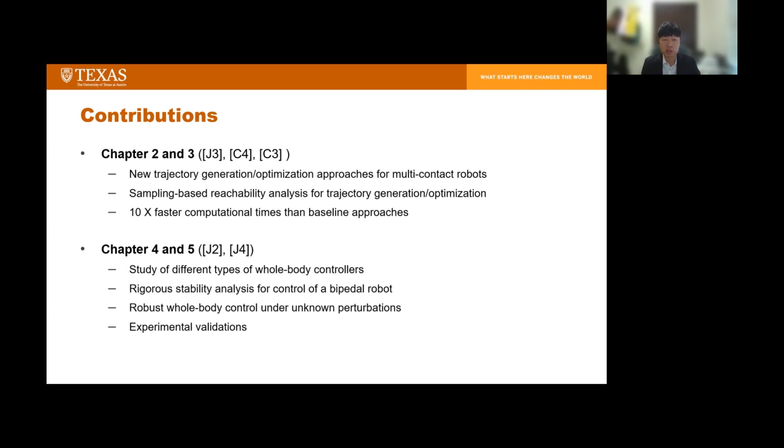unknown disturbances. In chapter 6, we propose a new algorithm called hierarchical covariance control and formulate the problem as convex optimization, which can be solved very fast. And chapter 7 shows the advancement of MPC to execute multiple hierarchical tasks.

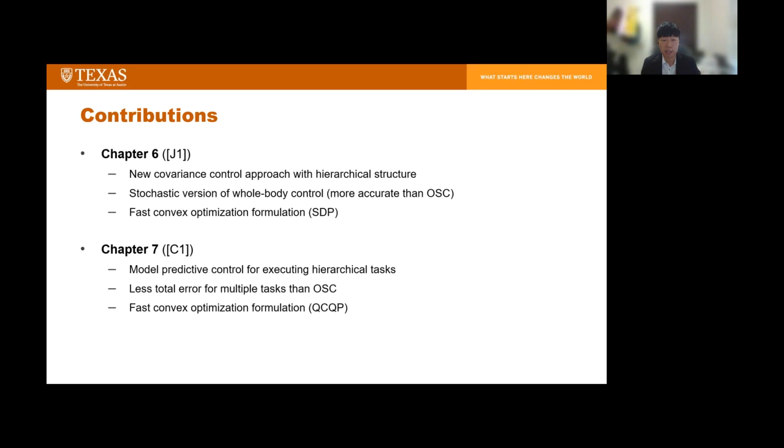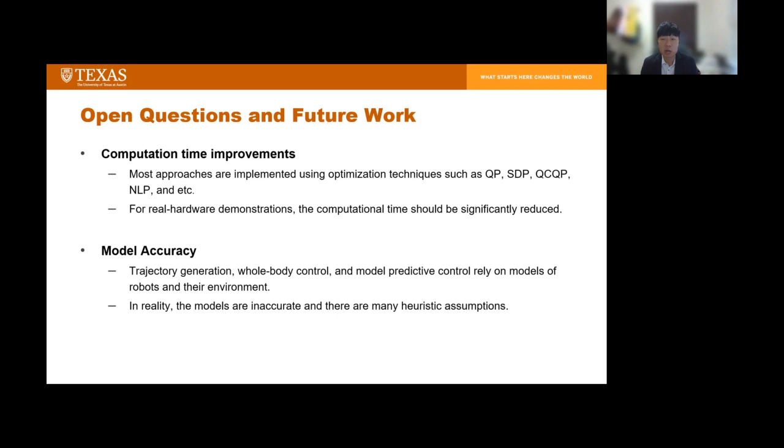I have several open questions and future work here. Most algorithms in my thesis rely on optimization techniques, so computation time really matters for real hardware demonstration. We need to improve the computation efficiency. Also, I assume our model is accurate, but in reality the models are frequently inaccurate, so I need to improve the model accuracy using some learning techniques.

Lastly, I need a very interactive high-level planner for additional safety warranty. Also, there are too many hyperparameters needed to be tuned for our optimizations. If we can find these parameters very autonomously, our approach will be more useful in real human life.